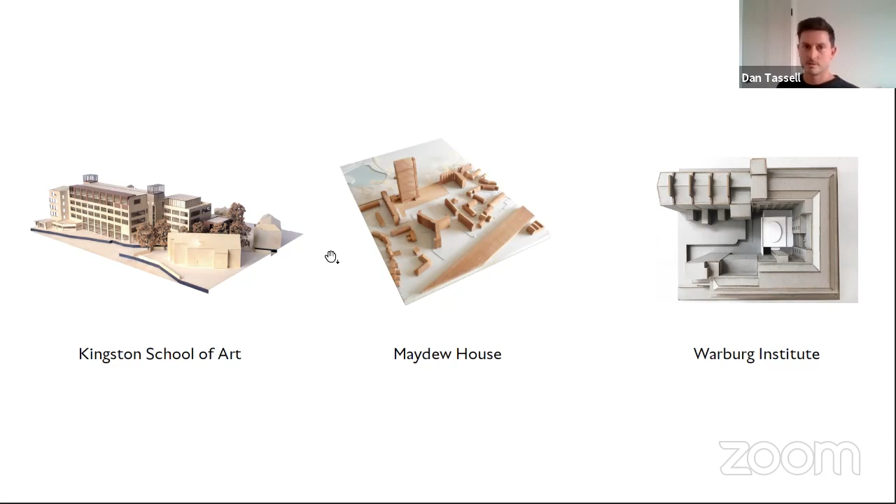It was originally within this attractive 1930s building, completed in 1939, and it's a somewhat unique spot for an art school in many ways, because it's removed from the big central London institutions. It's a place with a calmer energy, where people can focus on thinking and making and creating. The school's ethos is thinking through making, and that was something we had to work hard to reinforce through our design.

In subsequent years, that's the 1930s wing, the corner of it there. The school extended all the way along this part of the river. A building was added in the 1950s. A tower was built in the 1960s. And then this large building in the foreground was built in the 1970s and provided some 8,000 square meters of studio workshop space. It's this building where the majority of our work was focused.

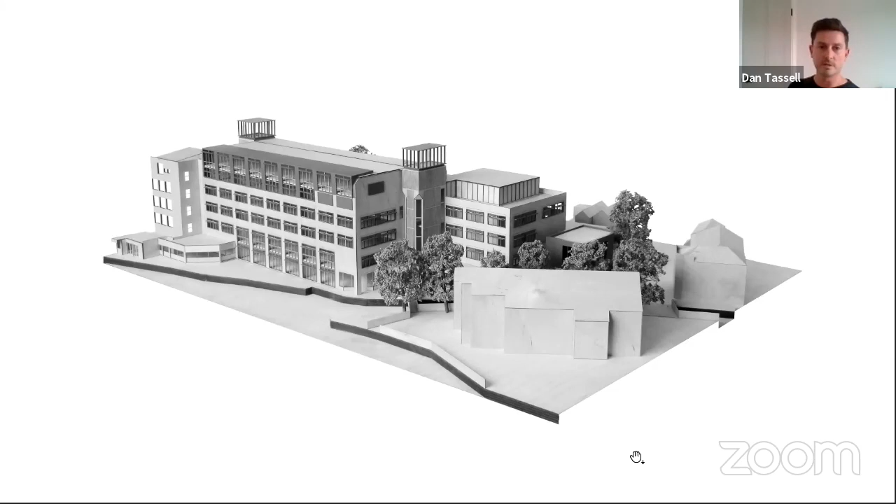On the north side, by relocating all that plant space, we were able to introduce a lot of north-facing design studios, all with their own roof terraces and access to green roofs, which we added to these large areas of flat roof. We also created views into the workshops at ground floor.

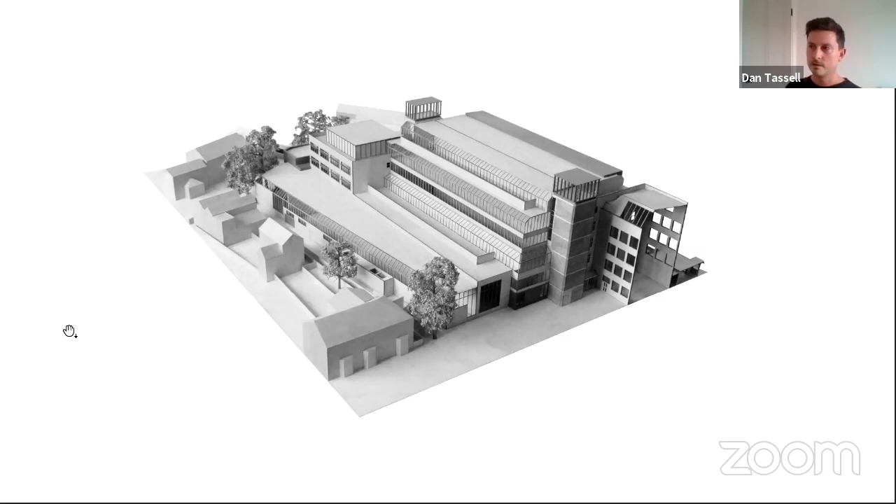So with any project like this, there's a negotiation between dozens of different stakeholders. In this case, we had 9 individual art and design departments, a dozen different workshop disciplines, the estates team, senior leadership team, staff, students, residents, planning authorities, facility managers, IT managers - lots of different voices in the process. So I just wanted to pick up one or two of the narratives from that process today.

So in parallel to having conversations with people like Richard about the workshop layouts and their design, we were also developing our own details for some of the new features of the building. One of the things we worked on was how to address the overheating issue to the south, and we devised these sculptural window surrounds that would be fabricated in steel and inserted into the window structure, into the reveals, to allow the windows to sit further back but also introduce a projecting ledge that would help cut out large parts of the solar gain.

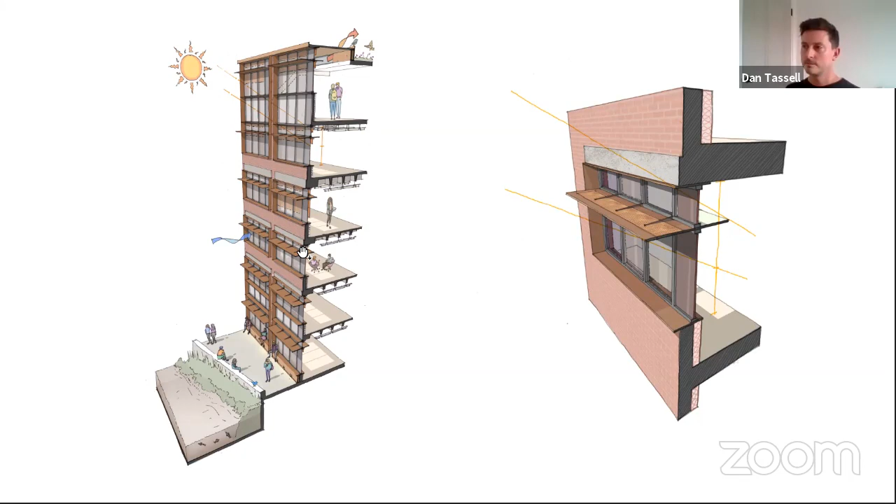We worked with specialist craftsmen and consultants who advised on some of the detailing, and worked up sketches with them - this is one of the early working sketches to start making design decisions about how these inserts would be detailed. We actually ended up avoiding any bolt fixings through the fins in the final design. You can see here some of the steel folds that give rigidity to the overall structure, and the fins themselves, which project about 700-800 mil. They borrowed from aircraft wing technology to create a really rigid body that could span the full width of the reveal.

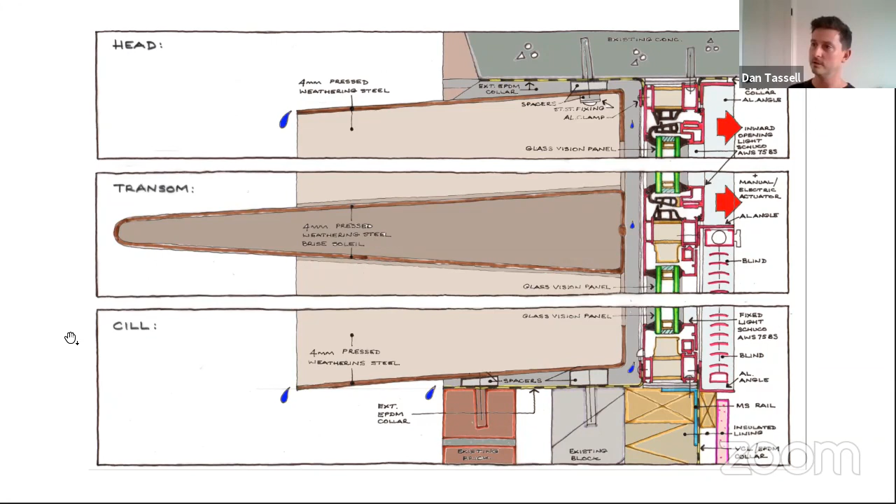Then we were working with the steel fabricators as well, developing the working drawings. This is a photograph from the factory of the drawings laid out on the raw material before it's cut - the cutting patterns laid out to reduce material waste. So there's quite a lot of digital process in this as well. The steel is then cut in very large sheets, and the image on the right shows the corner of one of those projecting aerofoil fins with the steel wrapped around the blades.

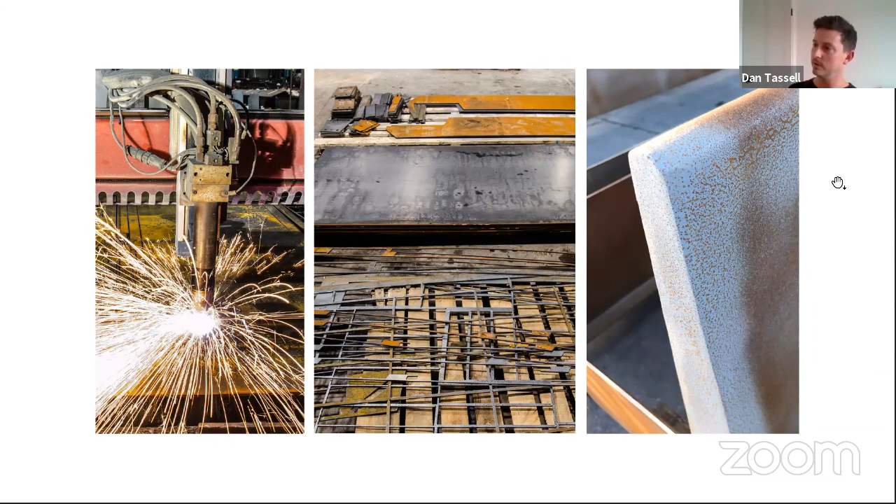Each of these assemblies was then prefabricated in the workshop, and the head of the factory actually lives on site, which is quite handy because he could come out and check the assemblies. They were pre-weathered in the courtyard, so he could go out and hose them down in the morning and help them oxidize in the sunshine.

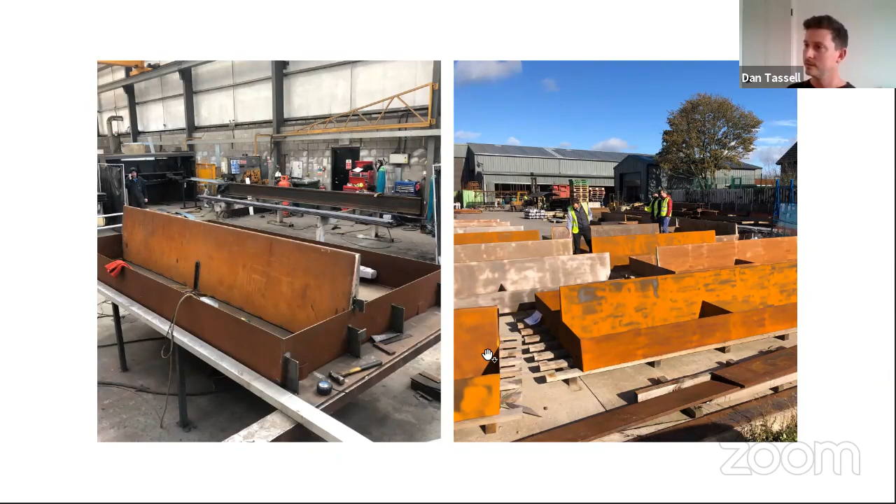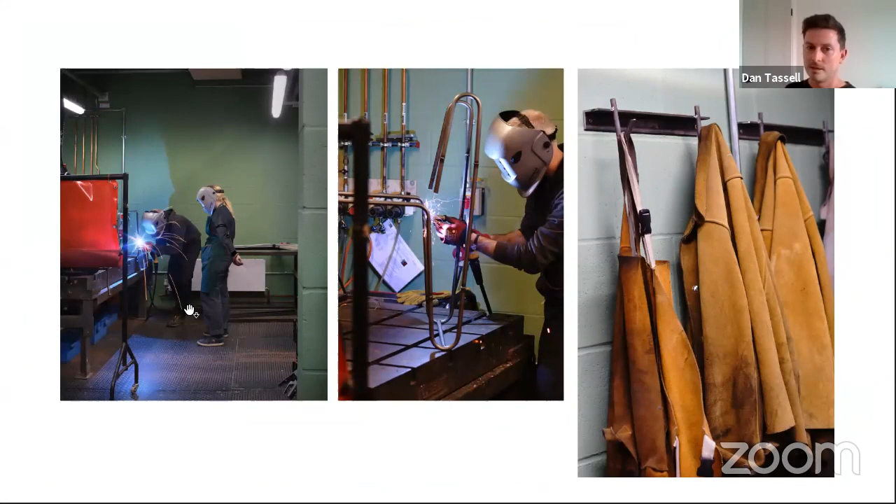So there's a sense that there's some sort of dialogue between the craft and the fabrication of the new additions to the structure and the functions housed within the workshops. And these are just some photos from part of the metal workshop where they're doing some welding.

Within weeks of moving into the building, they were fabricating their own coat hooks for their welding jackets, and there's a kind of continued evolution of the building even once we've left.

Generally, the workshops were arranged according to their functions, so different functional processes were grouped. Through dialogues with people, some of the technicians, we introduced screens between workshops so that they could oversee different spaces, and introduce screens for controlling noise and dust and different processes. The idea is that all the workshops in the building are completely open access and available to all staff and all students on all courses, which opens up lots of interesting possibilities and crossovers.

The design studios, previously to the refurbishment, as courses expanded and contracted, there were real issues with having to constantly be refurbishing the building and knocking walls down and rebuilding them. And it was a hugely wasteful process.

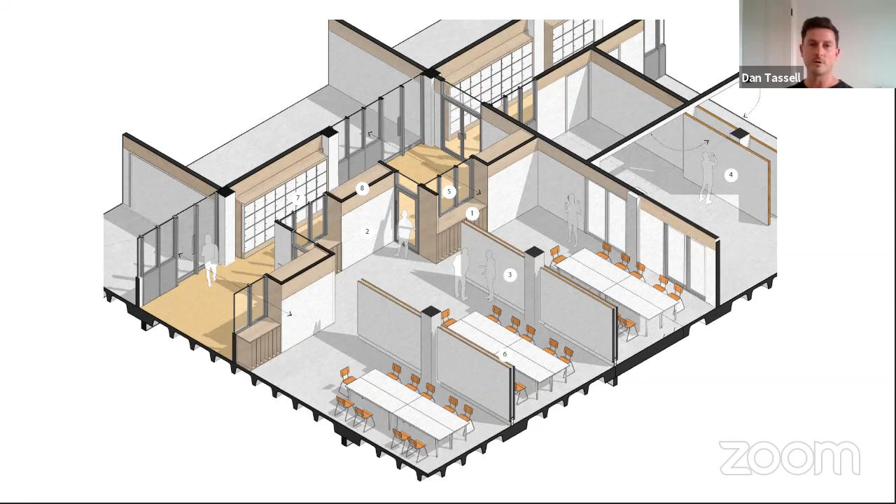So one of the things we came up with was a sort of flexible infrastructure of good sized studios, all with power, pin boards, sinks, storage, projectors, and so on, so that courses could expand and contract into different spaces without the need for constant and costly alterations of the building fabric.

So this just shows one of those studio units with the corridor, with glass onto the corridor giving views in, and the furniture and pinboard surfaces.

And this is it in occupation, and the joinery was all designed so that it could be swapped in and out. So if a course moved, the joinery units could come out and they could take them with them and slot them into the new studios.

So famous Kingston resident, Eadweard Muybridge, you'll know his time and motion studies helped facilitate the evolution of the image into a time-based medium.

We were very careful to try and co-locate all the image-based workshops, so you have this lineage between printmaking, photography, moving image, animation, motion capture, and digital media, all within the same part of the building, reflecting hundreds of years of the evolution of the image from a static medium all the way to a time-based and a digital medium.

And so someone can design a new typography set in the digital media lab. They can get it 3D printed. They can cast the typographic sets into metal. They can use a 19th century printing press to produce a book at the end of it.

You've got other processes such as the architects being able to have their drawings digitally knitted, using the fashion workshops. And there's a lot of potential within those crossovers for exciting possibilities for creativity and innovation.

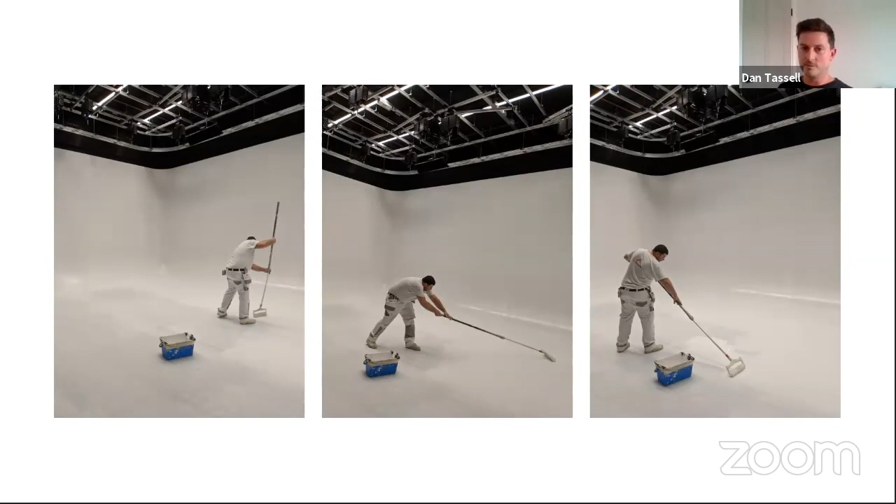And so, behind all these kind of ideas and great facilities, there's hundreds of people actually contributing towards the construction of a project.

Following lots of discussions about the purest, least reflective, most durable white paint to create this backdrop for the digital film studios, underneath it all, the building is still in a lot of places remarkably low tech, and you've still got someone painting an infinity wall in the project.

So all those people play a part in how the building comes together, and all have their own advice to contribute to that process.

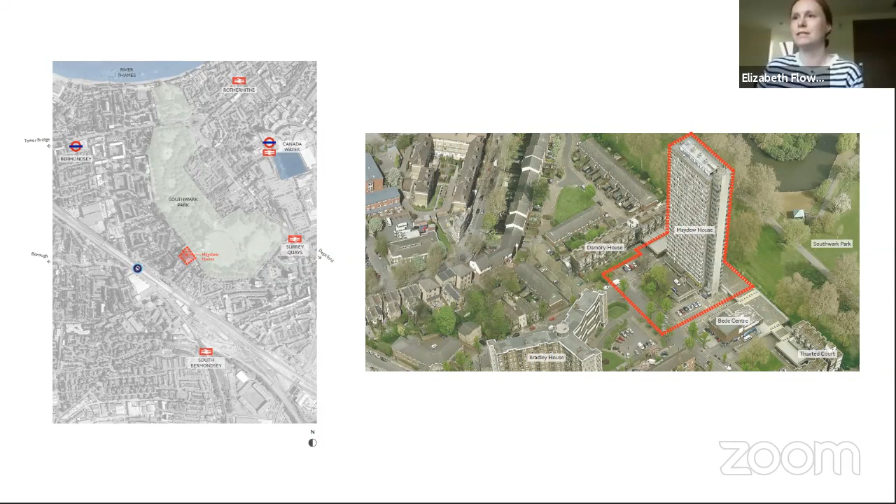The site's located in Bermondsey in South London, and the tower itself sits adjacent to Southwark Park, a large listed Victorian park to the east, and to the west faces the main railway link coming into London Bridge from the south. It's a very prominent location, and due to its height and the low suburban context, it benefits from long views from many different areas in South London, so it's fairly well known. It was originally built in 1966 by London County Council as part of the wider development of the Abbeyfield estate, which was primarily comprised of low-rise blocks and large areas of public space and landscape.

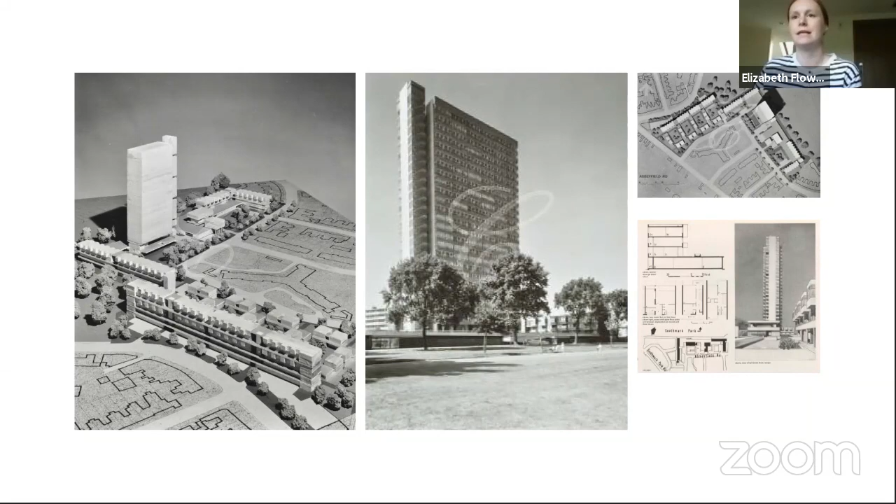We started the project by carrying out some initial research, and we found that several other iterations of this tower had actually already been built all over London in slightly different configurations of the same design. We also found a few examples of those that had already been refurbished and overclad, but these served to us as what we wanted to avoid, particularly as we felt the grain and essence of the existing building had really been lost in the refurbishment, and the facades had become very flat and lacked contrast.

We also spent a lot of time on site talking to residents and really getting to know the building and understanding the various issues that it faced. The key issue for us was really the lower two storeys and the public realm and ground floor.

As with many similar estates, there was the idea of streets in the sky. So the building has a long convoluted ramp which goes up to the first floor to access the main entrance, and a large single-storey podium area that contains car parking. So it has very little public face or active frontage to the estate.

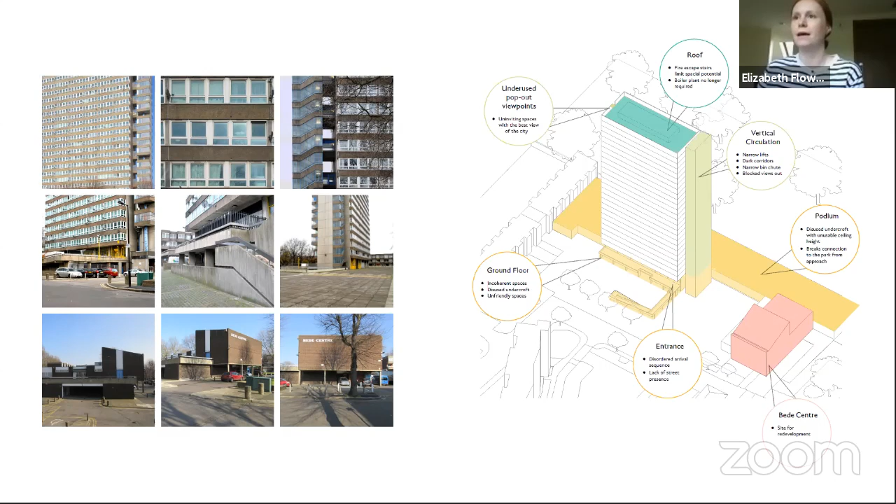Next to the building there is, shown in pink on the diagram, a community centre, which again is suffering from similar problems on the ground floor space, and also was suffering from poor condition and out-of-date services. So we wanted to try and address that community centre at the same time as part of the project.

This slide just gives an overview of the various parts of our proposal. The first move being to demolish this podium level ramp and first floor gallery. In doing so, we freed up a lot of the site to create large new residential facilities and a new residential entrance and communal spaces, shown in yellow, and then adjacent to that, a new purpose-built community centre, shown in pink, which wraps around the back of the building.

In addition, the existing tower's structure had been designed with quite a lot of extra capacity, and this opened up the opportunity to add a 5-storey extension to give another 24 homes on top of the existing tower.

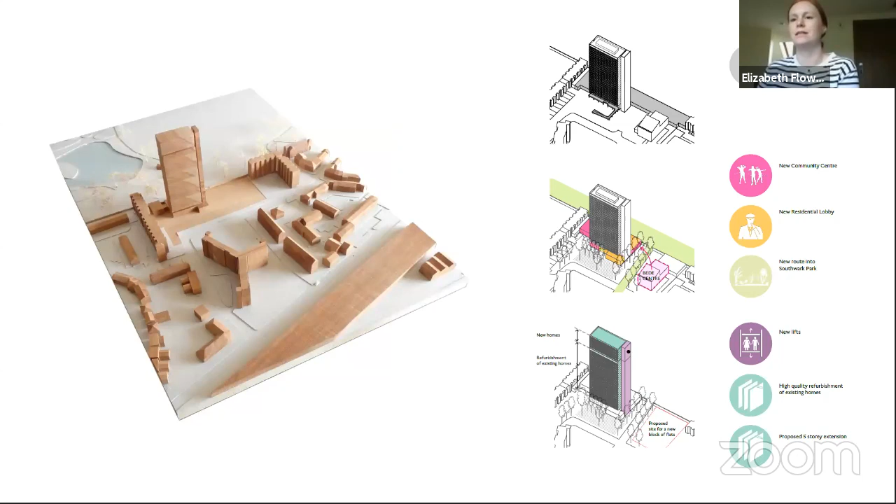As well as looking at what we felt didn't work about the tower, we also appraised what we felt really did work. Essentially we felt that it was a really strong piece of architecture and brutalist design, particularly its good bone structure, as we coined it.

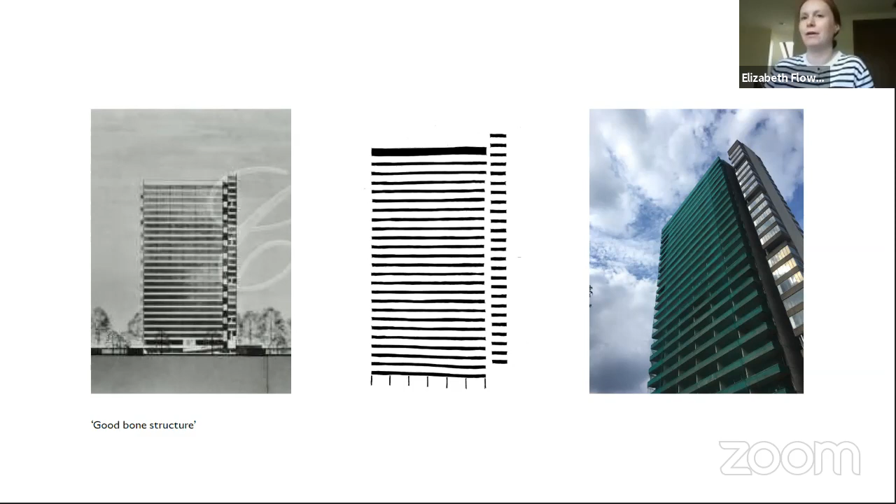This was a sketch that we did in the bid stage, right at the beginning of the project. But this only became more clear once the building had been fully stripped out and all the windows had been removed, and this bone structure of the concrete frame and the concrete spandrel panels really became apparent, showing the building's essential character.

Next came the challenge of designing a new facade for the building and new cladding. As well as wanting it to be a landmark project, Southwark Council had given the brief of no maintenance for the facade, wanting to avoid cleaning or any kind of regular maintenance at height, which really limited the amount of materials that we could choose.

So we built a large scale model, or several models, to explore the different options for the cladding. The first thing we looked at was a profiled perforated aluminium cladding in a zigzag pattern that would have been really eye-catching, quite highly contemporary, really answering the landmark part of the client's brief.

The second option was a glazed terracotta tile, a slightly more robust material, but one that could also be really attractive and shimmer in the light, creating a new look for the tower. The third was profiled glass reinforced concrete, which has a tough, fairly brutalist, sculptural expression that we felt could also work.

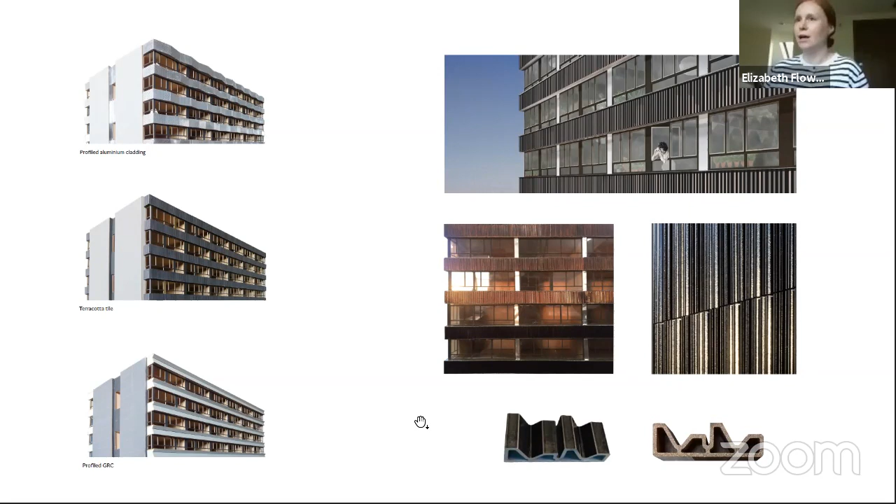But the ultimate option chosen was the terracotta tile. We visited a terracotta factory in Germany and chose a profile design that we felt would really add this effect of the light changing across the building, particularly as you approach it on the train and come around it in three dimensions, approaching London Bridge Station.

Next, we looked at the window and fenestration design for the new tower. We looked back to the original 1960s design and discovered that the windows replaced in the 1990s with PVC had lost the original pattern. That was something we really liked and wanted to reinstate, including the two-tone nature of pale openable frames and darker fixed frames, to add contrast and more texture.

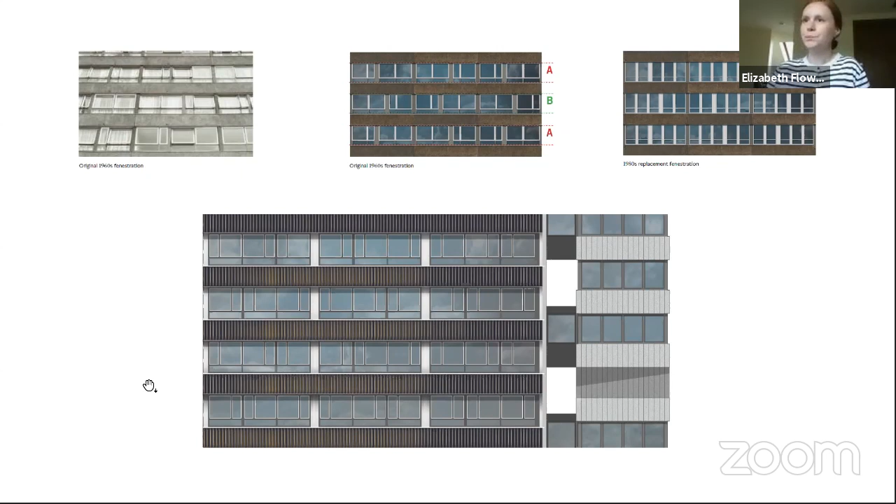When designing the extension for the tower, to be honest we didn't explore many options for this area, as we felt the most honest thing to do was continue the design of the existing tower within the new top, albeit with slightly raised floor to ceiling heights and slightly increased glazing. Instead of creating a glazed top hat with a lot of extra contrast, we added what we called the shadow gap floor between the existing building and the new extension, just to state the difference between the new and old.

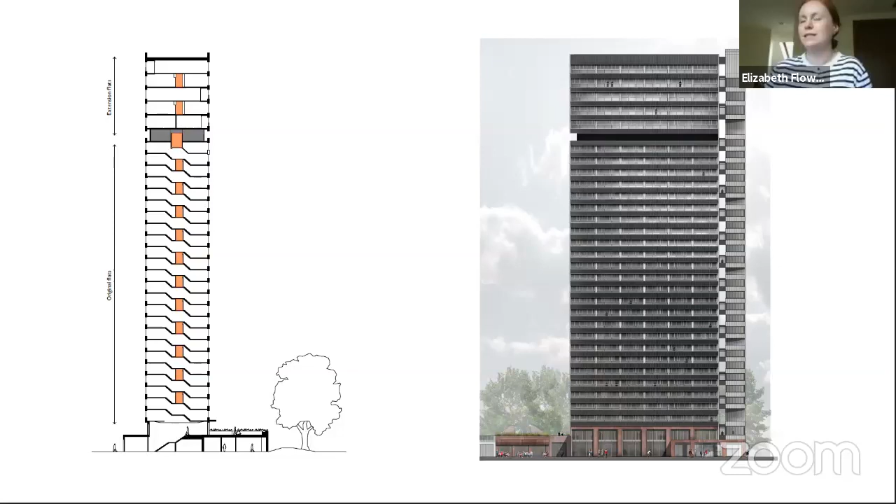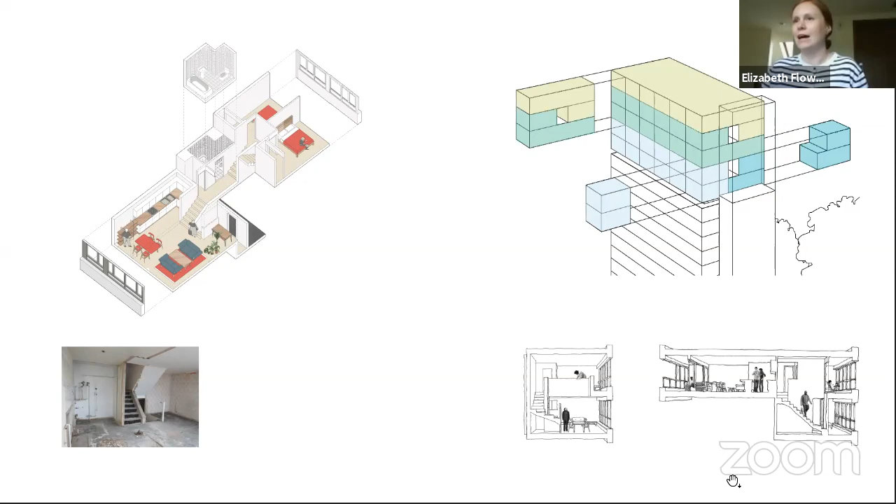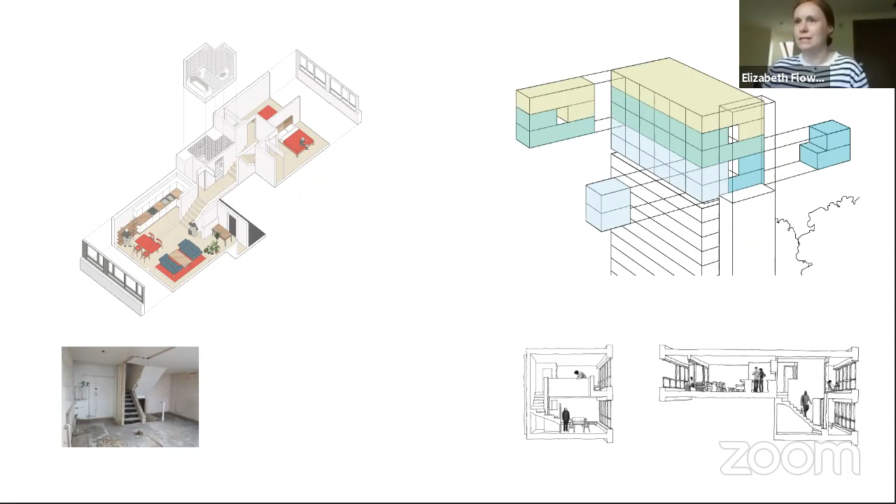When it came to the internal apartments, the existing apartment design is shown on the left. These are scissor plan interlocking flats sitting on three levels each. All bedrooms face the park and all living spaces face the street, which is really clever design. Unfortunately, within the new extension shown on the right, it's quite difficult to recreate these scissor plan layouts today due to construction costs and building regulations. Instead, we made sure all the units we designed within the new extension were duplex, two-storey, to continue the intentions of the original tower.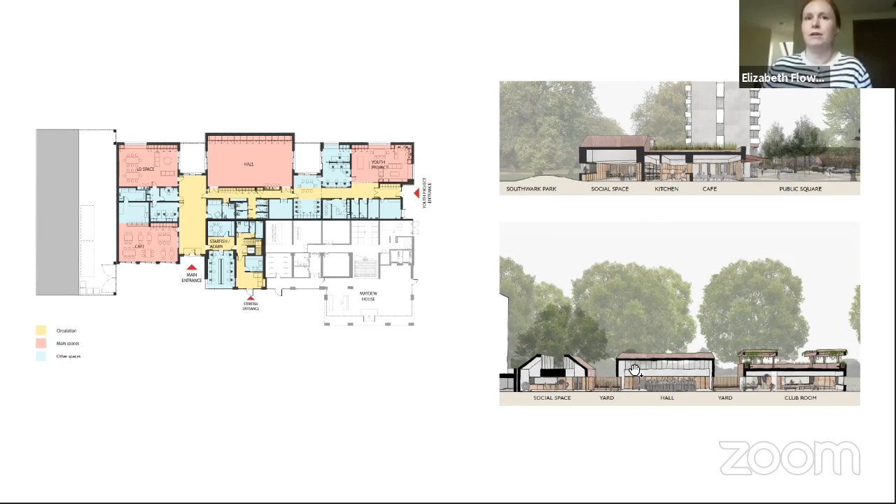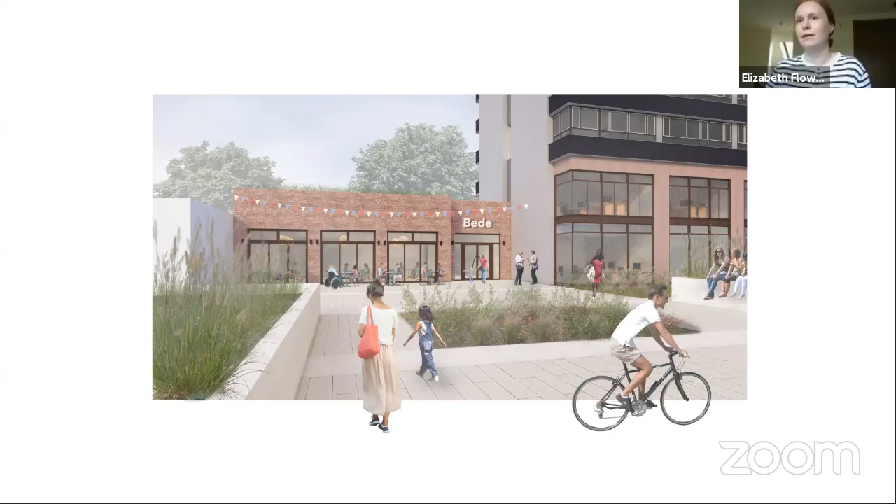And then finally, these two show the main entrance to Maydew House on the left, and on the right, the community centre looking out to the park.

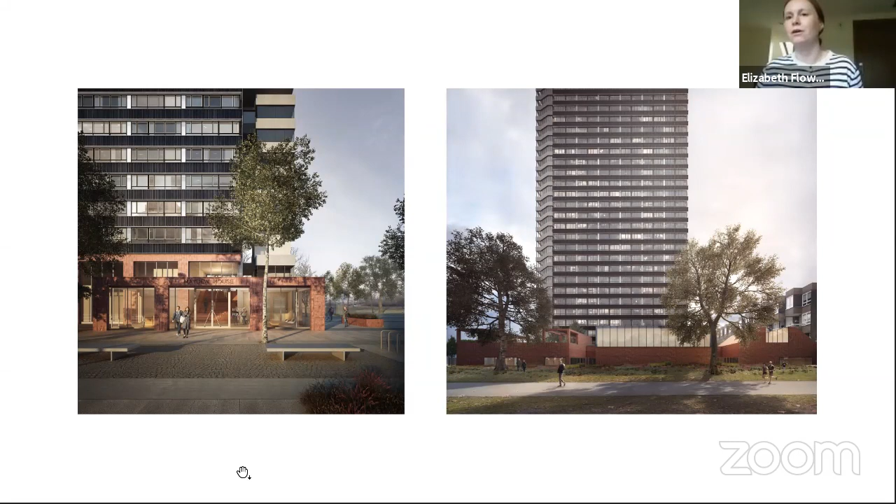So the next project I'm going to talk about is the Warburg Institute, which is the project that Mara is studying alongside us. It's a historic library and higher education institution, which forms part of the University of London, focusing mainly on the study of cultural history and the role of image in culture. We won this project via a competition in 2018 for the full refurbishment and extension of the building. The site's located in Bloomsbury in central London, really close to Euston Station and the British Museum, so very central.

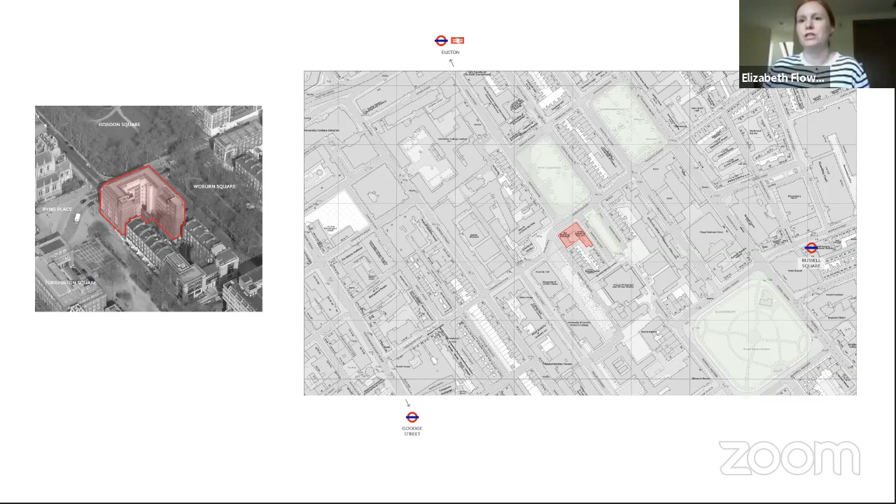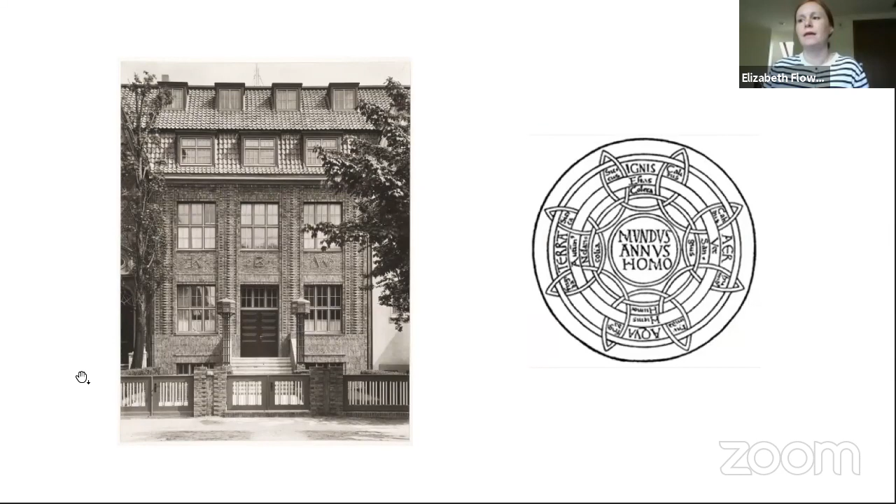However, historically, the Warburg Institute actually began life in Hamburg as part of the private collection of Aby Warburg, who was an art historian and cultural theorist. He founded the Institute at the end of the 19th century, and it quickly became really well known for the study of cultural science. As the Institute grew, Aby Warburg became increasingly involved with the architectural design of the new spaces, particularly this oval-shaped reading room, which was the main space of the Institute where many scholars would gather.

Then in 1933, the Institute relocated to London to escape the war, and after a few years became incorporated as part of the University of London, eventually given its own purpose-built home within the university's large master plan designed by Charles Holden, which you can see here on the left, with the Warburg Institute in the bottom left-hand corner. This master plan was largely unbuilt, so the Warburg is one of the few buildings from this master plan that was actually constructed.

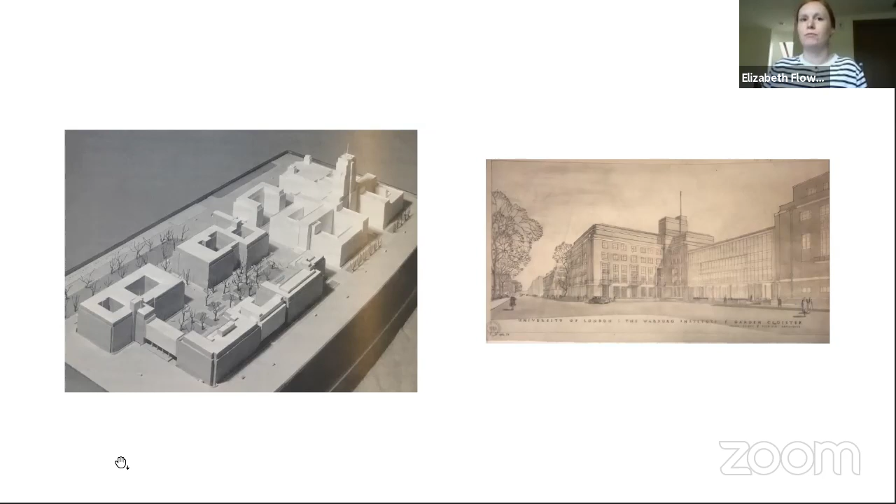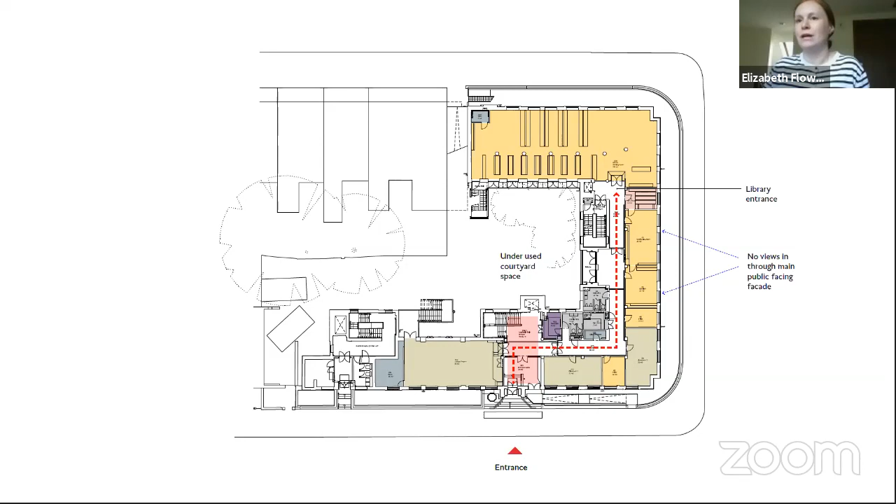What we felt did work about the building, to us, the real joy and quality is in the materials and details, and perhaps not so much in the internal layout. We spent a lot of time in the Warburg Institute getting to know readers and academic staff and what they liked about the building, and also carried out a room by room forensic survey of where these areas of quality and nice materials still existed.

So in starting the project, there were two key aims. The first was to open the building up and create views through the interior and also through the facade from outside to in. Secondly, to improve orientation and visibility, and to really populate the route from the entrance to the library to make it more inviting for the public and new users.

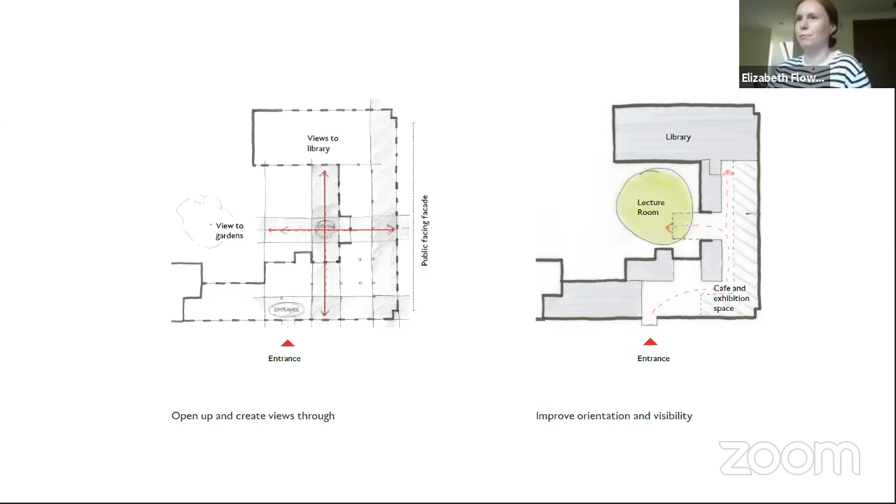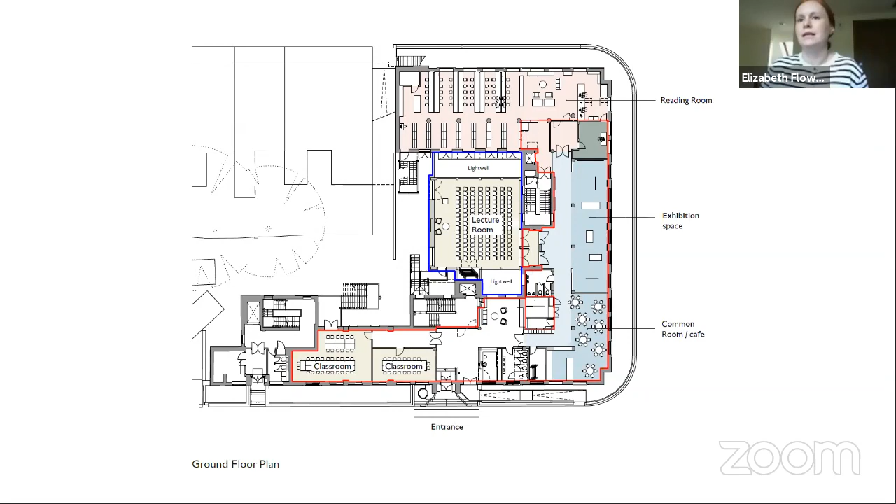This is our proposed ground floor plan, and you can see we've grouped together more of these public functions like the common room, exhibition space, lecture room and classrooms. We've also opened up the entrance foyer to become bigger, more open plan, more welcoming, and created open plan space shown in blue against the main facade to really allow views in and animate the route to the library. In the middle there, you can see outlined in blue the new extension we've proposed in the courtyard.

On the lower ground floor, the space is largely given over to collections, but within our new extension outlined in blue, we're proposing a new reading room that can be shared by these collections that were previously buried away in other corners of the Institute.

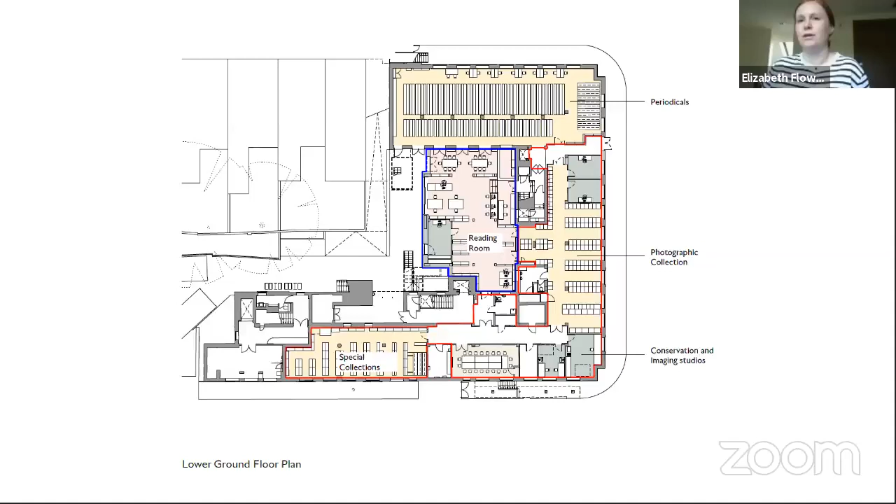These are some early models showing our explorations into where we could add area to the building and how we could allow it to grow. It was ultimately decided that the best place to add this area was the lower two floors, where we could increase these kind of public functions.

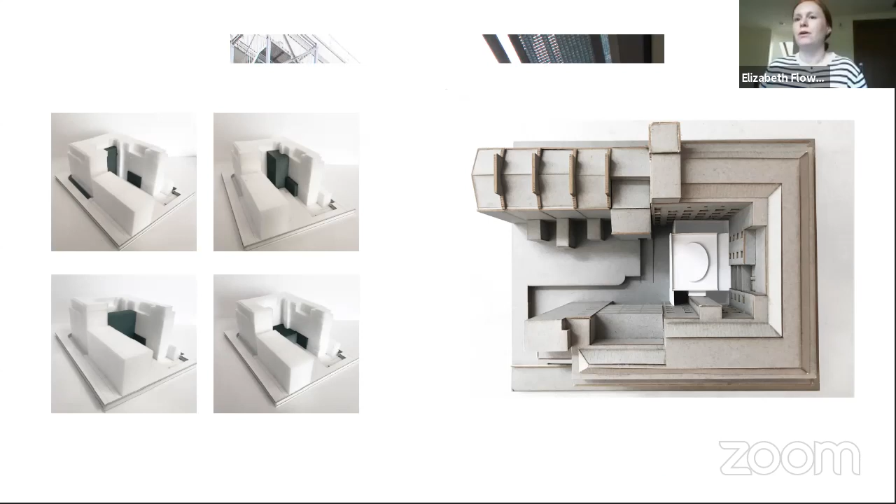On the right is an image of our eventual proposal of the courtyard extension. This is the courtyard in question, with its white glazed ceramic tile cladding that contrasts with the brick of the street-facing facades.

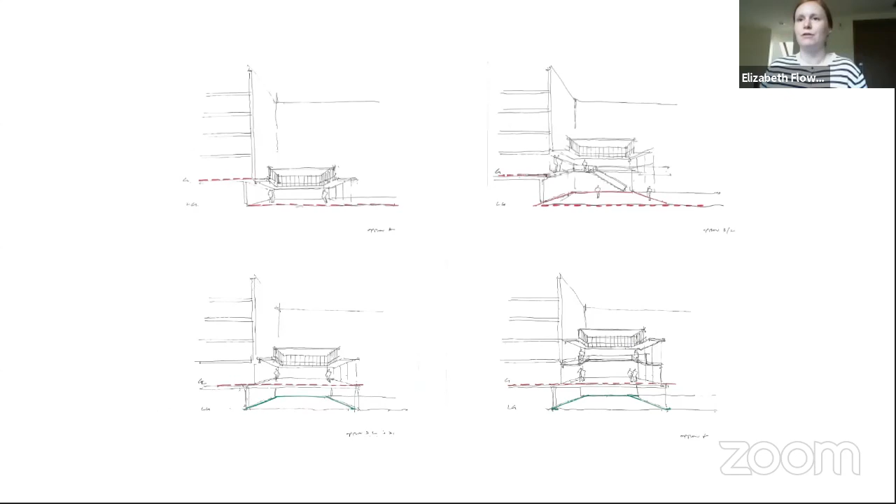With the extension, we started by exploring the vertical spatial divisions and hierarchy and the different options we had for creating space in the courtyard. This started with sketches and then followed through to models. We built this at 1:25 scale, a really large scale model of the courtyard space.

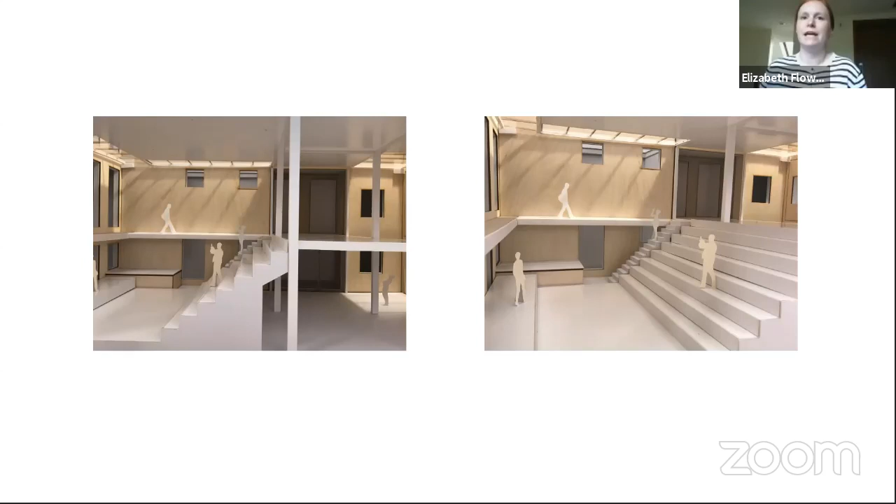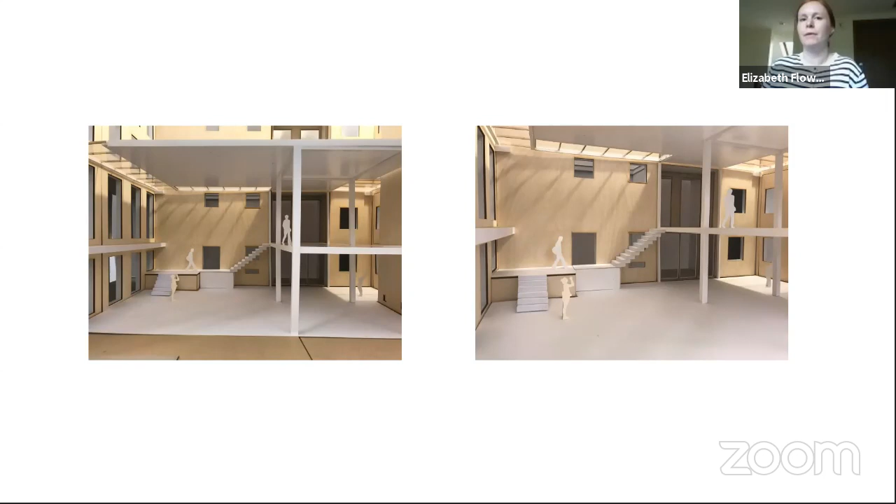The first option was a raked lecture theatre, with seating that steps down from the ground floor to the lower ground floor. The second option was for a more cavernous volume with a gallery level and then lower ground floor level below. The third was for a two-storey extension that was separated from the existing building by double height light wells either side.

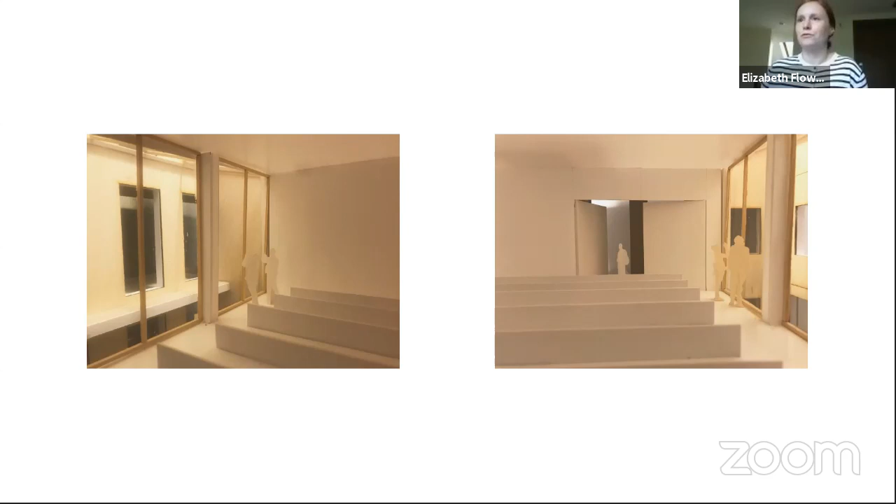This option was ultimately decided upon by the client as it gave the most usable area within the building for their money and created a flat floor lecture theatre, but still had the spatial drama through these light wells. So the lecture theatre is shown here on the first floor. Typically lecture theatres are quite closed down, quite dark spaces. However, we wanted to create these views through the building, so we designed glazed walls that could be screened with blinds to add drama and theatre when it was in use and not in use.

Through every point in the process of this design, we asked ourselves, what would the original architect Charles Holden do if he was in our position designing this new extension? We looked back to a lot of his original work and found that the running thread through many of his projects was this expression of structure in the forms of beams and columns. This was really true whether it was an industrial space such as a tube station or a much finer, more elegant space such as Maydew House.

So this structural expression is something that we brought into our own designs. It also had the effect of helping us separate the new design from the existing courtyard walls and clarifying the difference between the new extension and the existing.

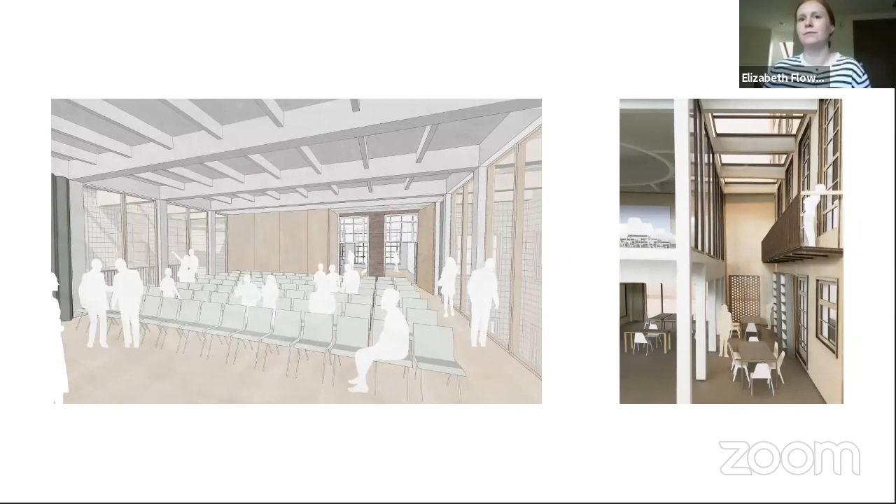At this point in the design process, the client threw us a slight curveball when they started asking about the ellipse, referring to Aby Warburg's elliptical roof light that featured in the design of his reading room in Hamburg. So we were faced with the challenge of incorporating this quite organic element into our quite regular, gridded design.

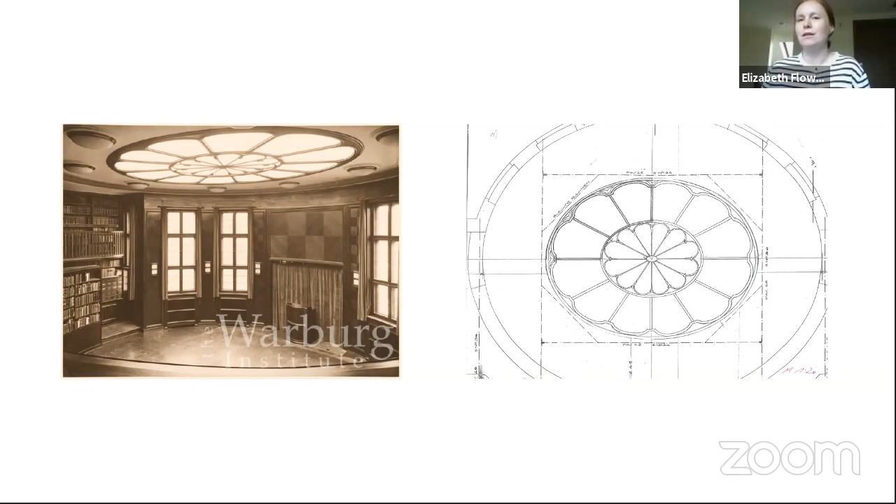So we developed the model a bit further and came up with three different options for how this could work. The first was that the ellipse could be conceived as a sort of elliptical sculpture or piece of artwork that would be suspended beneath the beams of the lecture theatre.

But the criticism of this option was that it was perhaps a bit too lightweight, a bit tacked on, and not really Warburg's original idea.

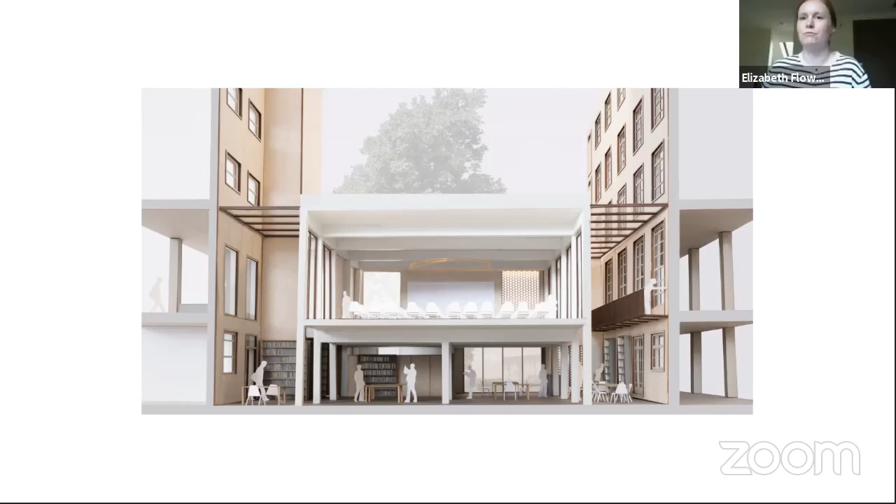The second option looked at marrying together the ideas of both Holden and Warburg by making the ellipse an integral part of the extension structure.

The third option really gave precedence to the ellipse by hiding the structure above a plaster ceiling and letting the ellipse take this really pure form, quite a direct translation of the Hamburg precedent.

Ultimately, the client decided on option 2, as it was felt that the marrying together of both Holden and Warburg's ideas was quite strong and gave an elegant expression across the ceiling.

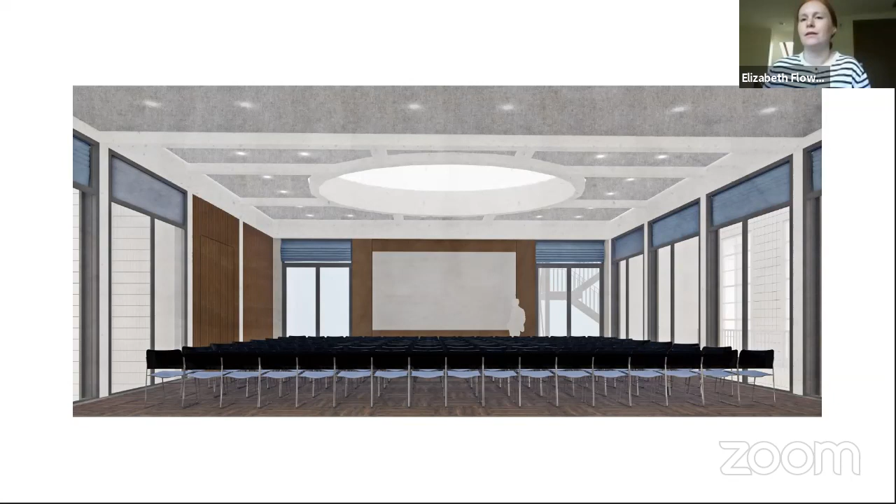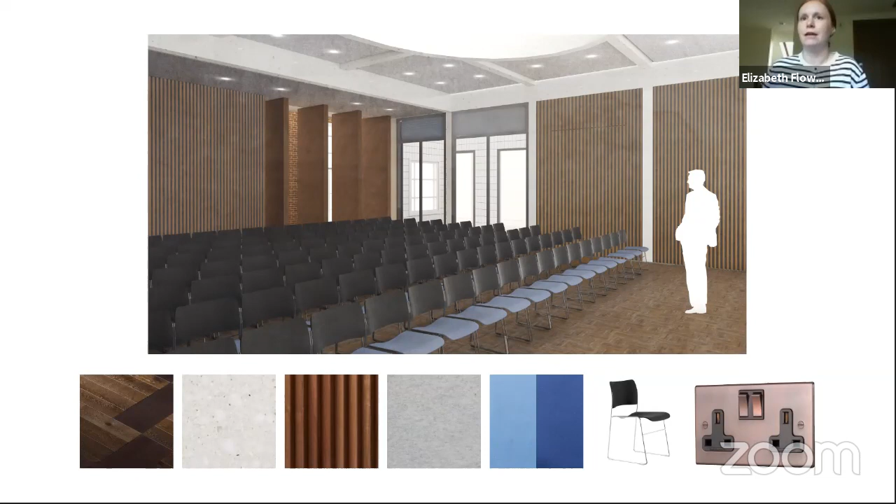Internally, we looked to finish this new space very much in keeping with the interiors of the existing institute and Holden's designs. So we've specified a dark woodblock floor and slatted timber paneling, which both directly feature in Holden's building, but also introduce new materials like white polished concrete and grey felt infill in the ceiling between the structural elements.

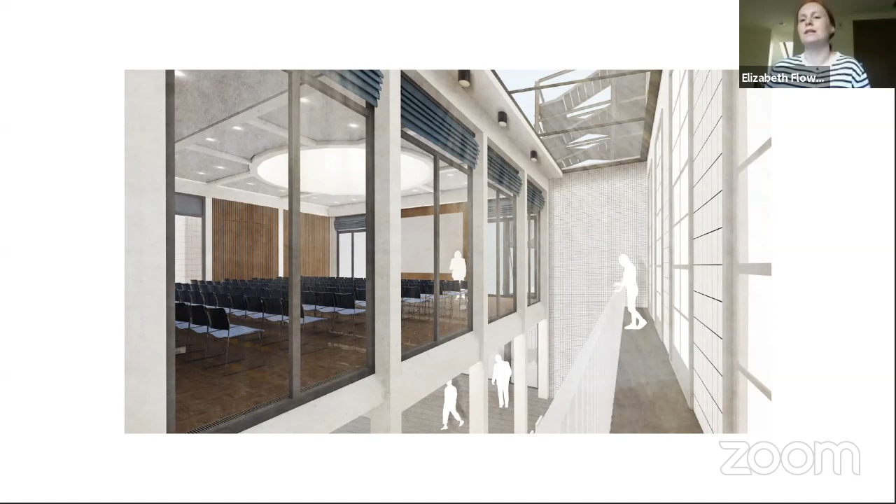And then finally, this is a view standing on the existing balcony of the Warburg Institute next to the existing reading room, looking over and into the new extension with the lecture theatre inside and the new reading room below.

So yeah, I think that's all we have time for today. I could talk about this project endlessly, but thank you for listening.